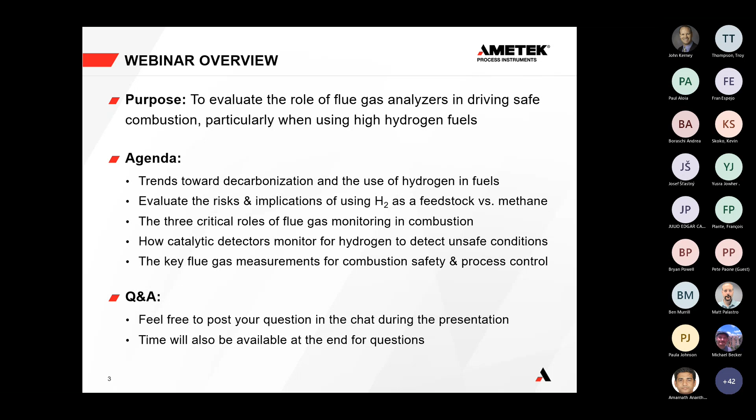So to start off, let's talk about decarbonization. There's an inherent move towards decarbonizing combustion processes in industry in general. Governments have signed a lot of net zero carbon emission policies. There's a big focus on climate control and reducing greenhouse emissions, and that is particularly the case around carbon dioxide.

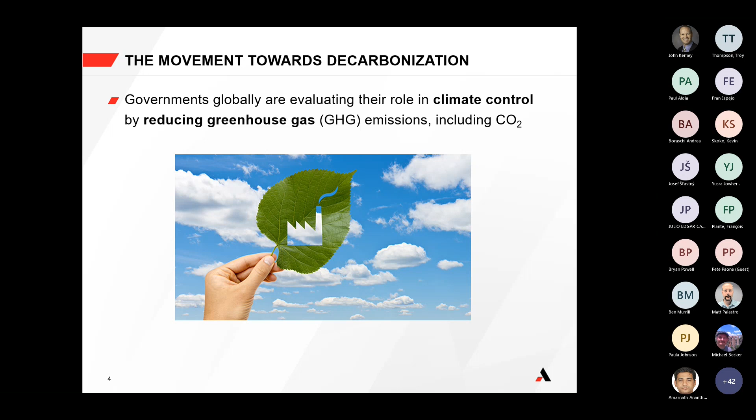And a lot of industries in the midst of it still require combustion. Combustion generates carbon dioxide, but a lot of industries still depend on that, including hard to decarbonize industries such as steel, cement, and chemicals, but also things like mobility in vehicles and ships and transportation. So there is still a heavy dependence on combustion and combustion-related processes.

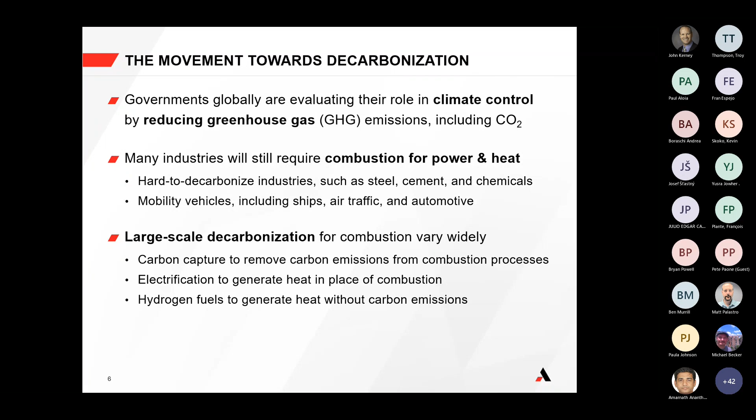When we think about large-scale decarbonization around combustion specifically, there's three methods that come up pretty commonly. There's the carbon capture method, with different carbon capture methods to remove carbon emissions from the combustion process itself. There's also electrification to generate heat in place of combustion, using electricity so that you don't have to rely on the combustion process. And there's also the use of hydrogen, which does not have any carbon atoms, so using hydrogen as a fuel to generate heat without carbon emissions. So that's another option as well.

So when you look at it, combustion remains important for our future, but it's also moving towards decarbonization. So we have to think about how are we going to decarbonize our processes.

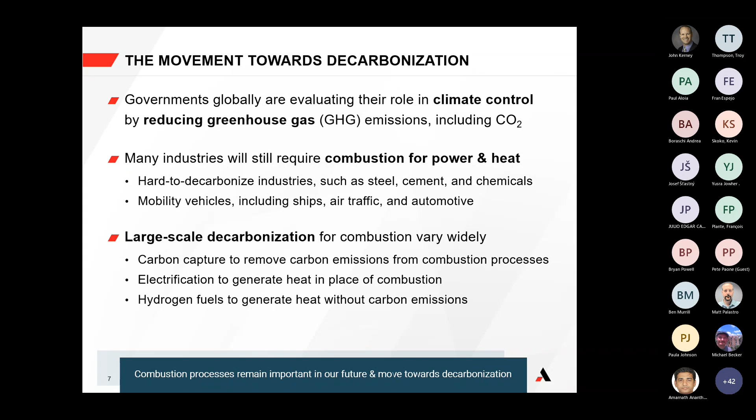So let's talk about those three methods: carbon capture, electrification, and hydrogen. When we think about carbon capture, whether that be pre-combustion, post-combustion, or oxy-fuel carbon capture, however you choose to remove carbon dioxide from the combustion process, it's pretty well suited for certain applications.

Carbon capture is much more economical, especially on the grand scale when you have a singular process or a singular pipe flow that holds a large amount of carbon dioxide. So things like blue hydrogen production, with autothermal reforming or partial oxidation or steam methane reforming, different processes that generate syngas can use carbon capture very well because much of the process stream is consolidated, and that centralized singular source can be sent downstream to the carbon capture system for treatment and removal of the CO2. So it's pretty well suited for large scale systems and centralized emission sources.

But it becomes more of a challenge, especially when you look at flue gas carbon capture, where some plants have many different carbon point sources, combustion point sources, where it would take a lot to revert all of those stacks to a common duct and then use low pressure carbon capture methods to remove the CO2. All of that tends to be much more costly for those types of carbon capture methods for flue gas, and it can require a significant amount of equipment for those processes. So that's just the view on carbon capture.

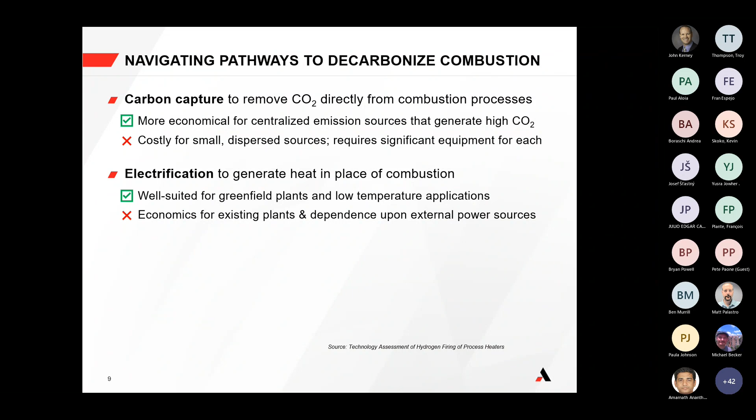And then for hydrogen, fuels tend to be much more versatile. It's sort of agnostic whether or not it's a centralized combustion source or small dispersed combustion sources and furnaces. So much more flexibility there because you're just basically changing the fuel from what may be natural gas or oil to hydrogen or a hydrogen blend. So it's much more versatile from that respect, and it has much less of an impact at the combustion source.

There may be considerations - it would be prudent to get an evaluation to see how your burner can handle hydrogen fuels, but outside of changing maybe the burner and some piping, it has much less of an impact at the combustion source itself. You're not installing large amounts of carbon capture systems, for example, large absorber towers, or changing the entire vessel to be electrified. So it has much less of an impact on the combustion source itself, and it also has less plot space requirements - like I said, there's no major absorber tower to accommodate within your plant.

And the other thing to realize is that hydrogen fuels are not new. They're actually used as a byproduct fuel in many industries. One case that comes up pretty often is refinery fuel gas in refineries - some refinery fuel gases can contain up to 70% hydrogen. So it's not a new thing, and for some industries it's pretty common already. So when it comes to hydrogen as a fuel source, it certainly offers the most versatility for existing combustion processes.

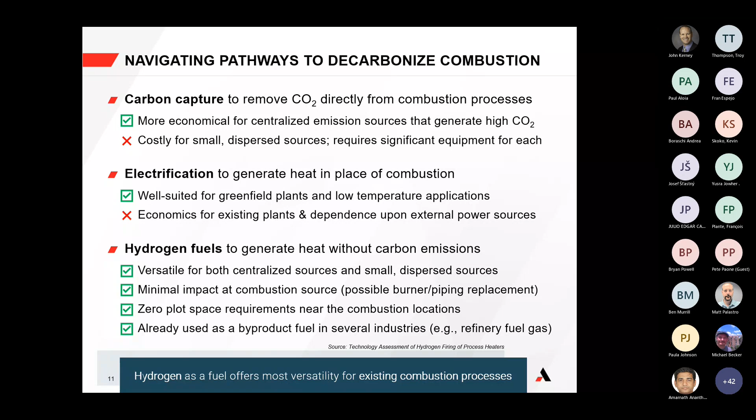Now let's take a look at combustion. Let's think about combustion and talk specifically about how the hydrogen molecule compares to the methane molecule. We can first talk about the physical properties and then we can go into the combustion properties.

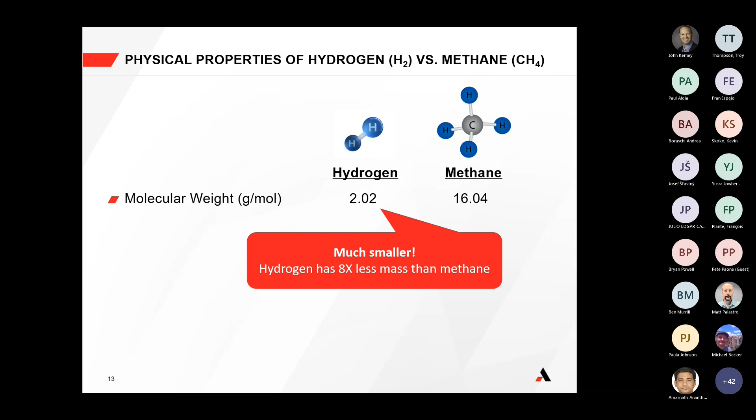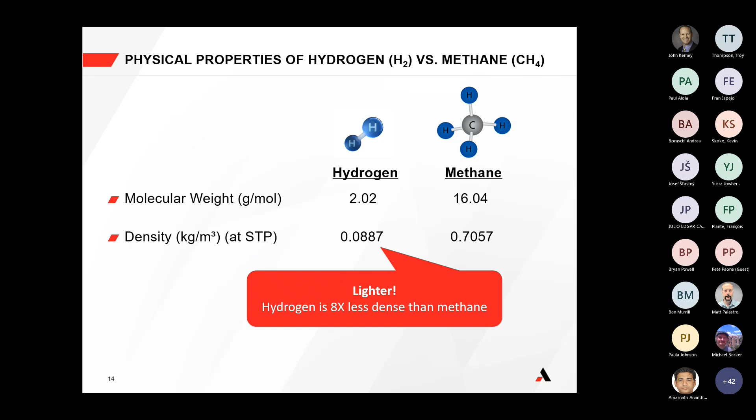On the physical property side, one of the most notable things is just the fact that hydrogen is much smaller - it's 8 times less mass compared to methane. And as a result, it's also much lighter; the density is much less, 8 times less dense compared to methane. So already you have this very small and very light particle in your fuel source. That's some differences already. And then also, because hydrogen is a small molecule, at the same temperature compared to methane it actually moves 3 times faster compared to methane.

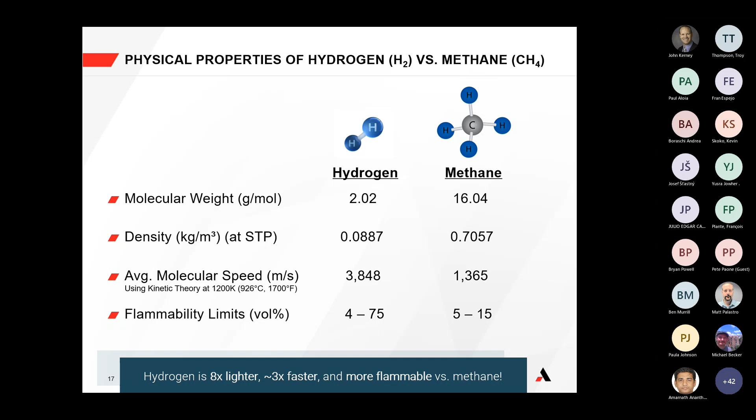So it's even more a fast moving molecule compared to methane at the same temperature. And beyond that, it has a much wider range of flammability. The flammability of hydrogen is considerably higher compared to methane, from 4 to 75%, compared to methane's window of about 5 to 15% by volume. So ultimately, hydrogen is 8 times lighter, almost 3 times faster diffusing compared to methane, and it's much more flammable. So when designing a combustion system and adding high hydrogen fuels and high hydrogen fuel blends, there's something to consider here for these differences. So that's just the physical properties.

Now let's talk about combustion properties. Hydrogen's unique because it's such a small molecule, but it also contains a lot of potential energy. So when we look at it from a volumetric basis, because it's so small, you're going to need 3 times more volume of hydrogen in order to meet the same heat release that you have with methane. So if you currently have your fuel flow monitoring system set up on a volumetric flow basis, you would anticipate needing 3 times more hydrogen in order to get the same amount of heat release as what you might be using with methane right now.

But on the flip side, if you monitor mass flow of your fuel, you'll need about a third of what you currently have as a mass flow for methane for the same heat release. So it's pretty important to be mindful about whether you're measuring flow on a mass basis or on a volumetric flow basis, because that has different implications for what you anticipate when using hydrogen as a pure fuel source.

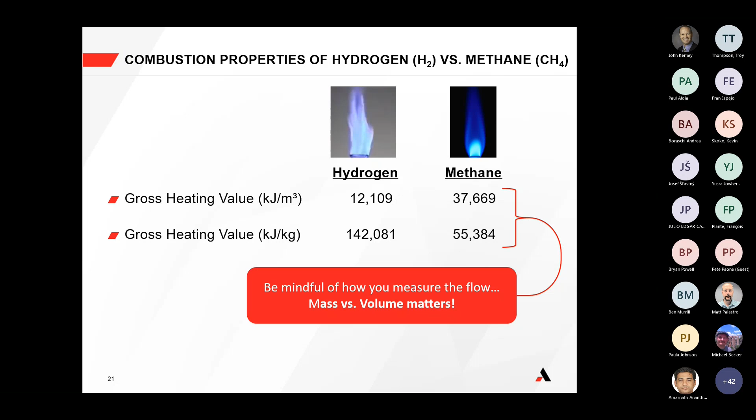Now beyond that, hydrogen also has a much faster flame speed, 10 times faster compared to methane. So if you use a premix burner, for example, you could have a potential issue of flashback, because those hydrogen flames will consume the oxygen as fast as possible. It is much more prone to flashback because of that faster flame speed. And then beyond that, it also burns slightly hotter compared to methane, so something to be mindful of, especially if you have certain metals around your burners.

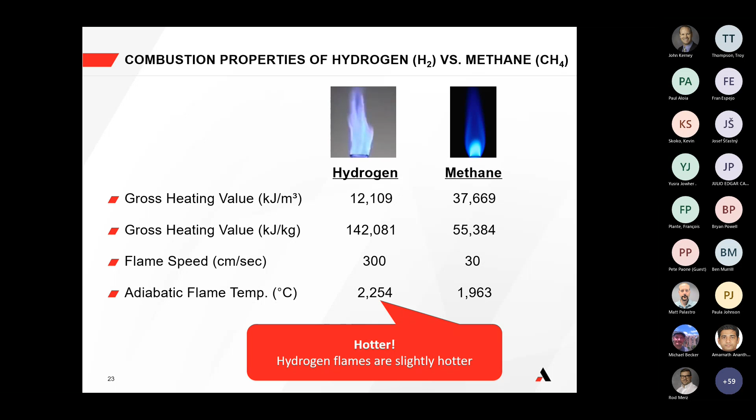On an ignition temperature basis, hydrogen is similar to methane, but it still requires less temperature to react compared to methane. And finally, less energy is needed to ignite hydrogen compared to methane, and it's not just a little bit less—it's 10 times less energy to ignite hydrogen over methane. So something to be aware of is that it's much more prone to sparking and ignition because of its much lower ignition threshold, being a much smaller molecule as well. Ultimately, the takeaways on the combustion properties of hydrogen are that it's 10 times faster on a flame speed basis, it burns hotter, and it's important to consider those differences in heating values, whether on a mass basis or a flow basis.

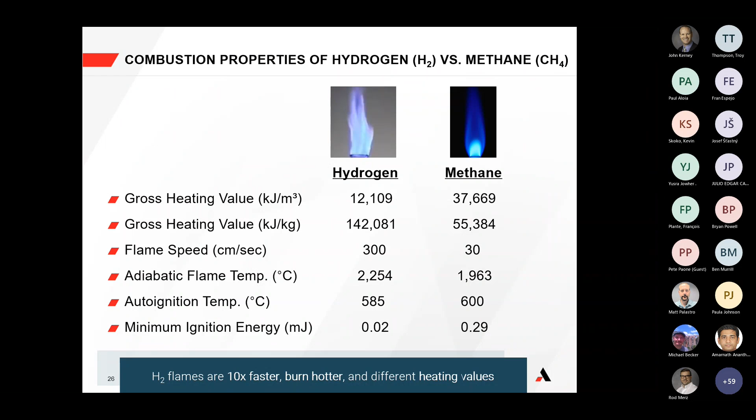So pulling that together, some other implications of using hydrogen versus methane: there's less air required. If you were to design the combustion reaction around the same heat release, you would actually need 20% less air compared to methane. So if you have a high hydrogen fuel blend and then move to pure hydrogen, you have to be mindful that you have the right amount of air, because hydrogen by itself needs less air compared to a methane fuel or a mixed fuel. It's important to give some margin, especially if you're going to have potential swings in the composition of your fuel gas. So something to be mindful of is that hydrogen by itself needs less air, but if you have a mixture of hydrogen and methane or other compounds, you're going to need more air as a buffer in order to handle that high hydrogen fuel.

And then on a potential NOx emission basis, because hydrogen moves faster and burns hotter, those potential hotspots create more potential NOx. So that's something to be mindful of—monitoring NOx levels or NOx requirements, because depending on how the air is staged at your burner, that could dictate how much more NOx you could see. So there is a potential risk of having higher NOx emissions.

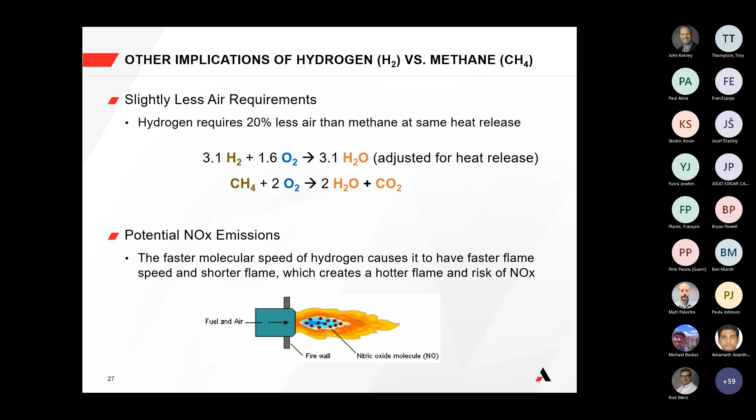So if we list those potential risks of hydrogen, distilling out what we talked about from the property side, hydrogen firing or high hydrogen fuel firing shows a potential risk of flashback, especially in premix burners. So that's something to be aware of.

It also shows the potential risk of higher thermal NOx production because of those hotter flame temperatures and because of that faster flame speed, smaller flame size, more potential pockets for higher temperatures, which generate higher NOx. And that could also impact permits, especially if your permit's on a ppm level basis, because you're changing that. It could also impact you on a permit basis because you're generating water and converting your permits to a dry basis. So that's something else to be mindful of as well.

Other risks: because of the high temperature, certain firebox geometries may have higher radiant heat directed towards the tubes, so higher temperatures at the tubes might be something to monitor. There's also a potential risk of overheating near the burner and other metal pieces. So it's important to think about what metal parts are exposed, whether a flame rod or other metal pieces around the burner, and consider either increasing the thickness of that metal or using a different type of metal to dissipate the heat and handle that exposure to hydrogen combustion.

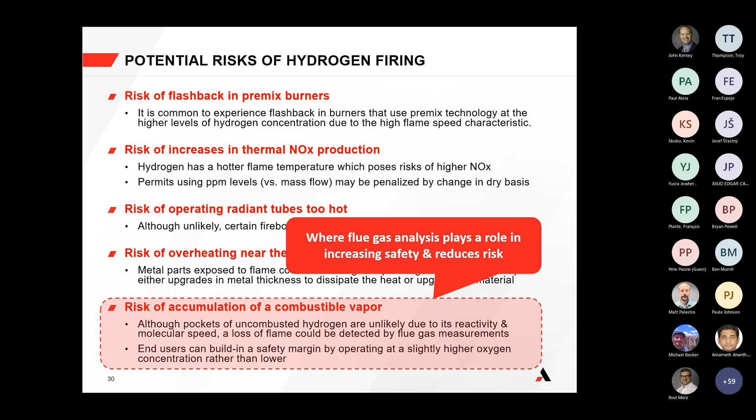So now let's talk about the three critical roles of flue gas monitoring. The first role is the operational set point, and I'll get into that in a second. The second role is optimization, so fuel efficiency, and the third role is safety.

When we talk about the operational set point, flue gas analyzers such as a zirconium oxide detector measure oxygen on an excess oxygen basis. That excess oxygen reading represents the oxygen remaining after all combustible content is consumed. So if there was any chance of a combustible cloud or methane, the excess oxygen reading would first consume all of that combustible content on the sensor itself, and then the remaining residual oxygen would be measured afterwards. So the excess oxygen measurement is important because it correlates directly to the air to fuel ratio at the burner.

If you have a low excess oxygen level, you can increase the air to the burner, and that would increase your operational excess oxygen set point. As I said, it ensures that you have sufficient air provided at the burner with a safety margin, so that you're not running at the jagged edge of stoichiometric conditions and potentially unsafe conditions.

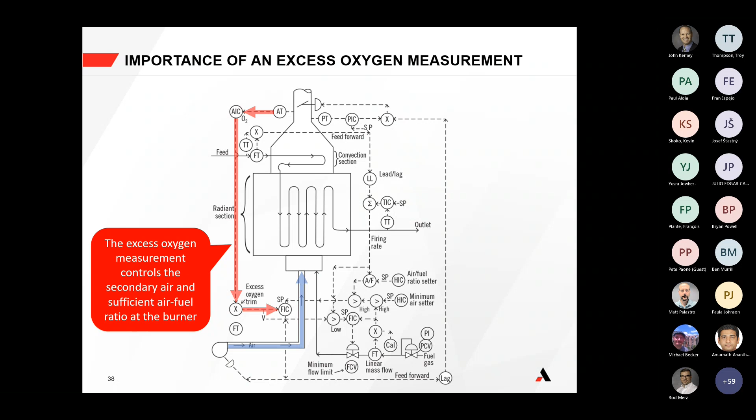So in either case, the excess oxygen measurement provides that secondary control, that operational set point, to ensure that you have sufficient air at the burner and a correct amount of air versus fuel for safe combustion. So that's the first important thing.

And then it's important to realize what's the optimal excess oxygen level, because your set point depends greatly on the fuel you're using. You could have many fluctuations based on the mixing characteristics within the burner, based on variable load and content of the fuel itself, especially if you switch between two fuels at a given time. It could also be impacted by humidity and density. So there's really no fixed value. So how do you know it's optimal?

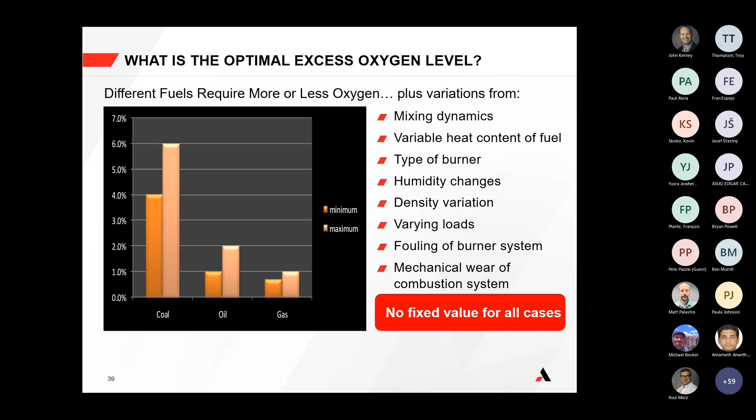That's where the second role of flue gas monitoring comes in, the role of optimization. Optimization means you monitor the health of the combustion process through what we call a combustibles measurement. Combustibles is effectively carbon monoxide and hydrogen. If you had a high hydrogen fuel, that would have some hydrocarbon content and some amount of hydrogen. The combustibles measurement would monitor for the unburnt carbon monoxide, and any incomplete combustion due to hydrogen would also be detected.

Just to put that into a reaction type state: if you were to use a high hydrogen fuel that has methane, for example, that methane molecule would first be consumed into ppm levels of carbon monoxide and hydrogen, and then only if there's enough oxygen present would that carbon monoxide and hydrogen convert further to produce CO2 and water. That's in the case of a high hydrogen fuel. If you had just pure hydrogen, you may have ppm levels of hydrogen you could monitor, and if you had spikes in hydrogen, you could effectively detect a flame out.

So let's talk about that role of optimization before we get into the safety element. When we talk about operating an excess oxygen measurement, as you increase your excess oxygen set point over time, you are running a little bit more and more less efficient, because at stoichiometric conditions, you could say 0% excess oxygen would be like the ideal scenario.

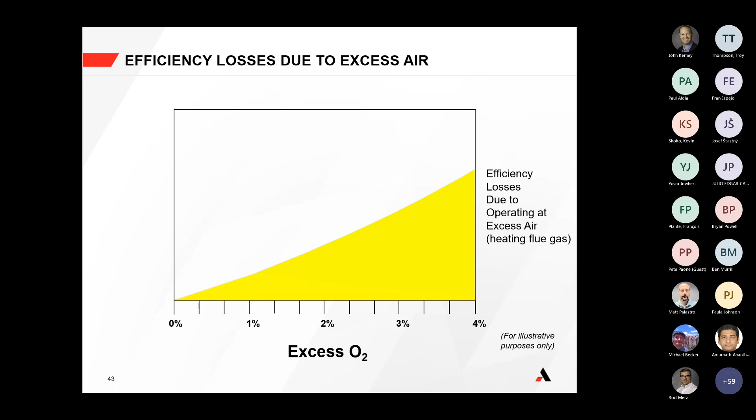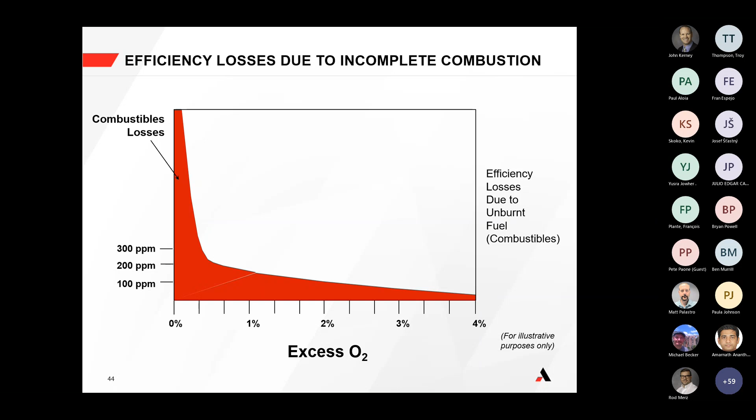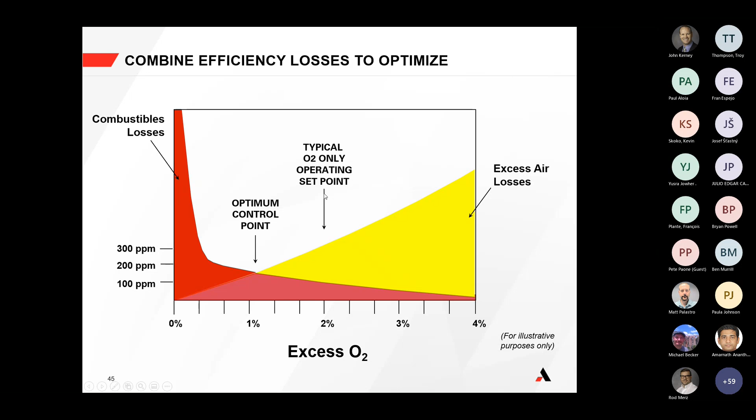But on the flip side, when you monitor combustibles, you have a potential risk of what they call combustibles breakthrough. So at some point, getting close to stoichiometric conditions of 0% excess oxygen, you have this risk of a significant spike in combustibles. And so by overlaying these two graphs in a hypothetical but very real way, you can go from what is once an operational set point to an optimal point.

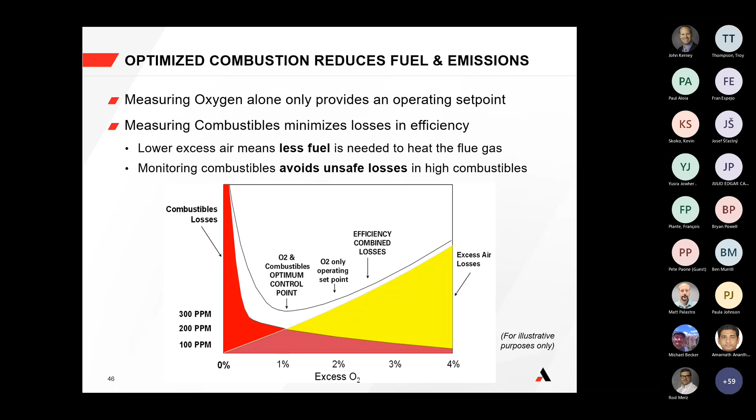As I mentioned, measuring oxygen by itself provides that operational set point, and that's the most important first step of any type of oxygen flue gas monitoring. But from there, that combustible measurement minimizes that loss of efficiency so that you lower your excess air levels, meaning less fuel consumption, and you also monitor for any potential unsafe condition beyond this breakthrough point. So from an optimization standpoint, there is a very real secondary reference point that combustibles plays in order to have an optimized combustion process, what we call optimized combustion.

And the third most critical role of flue gas analysis is the role of safety. Safety can come in the form of ppm level measurements for combustibles to make sure you detect the onset of incomplete combustion, and monitor for combustibles breakthrough. But then also the role of detecting percent level measurements of hydrogen and hydrocarbons from things that may be like a fuel leak or a loss of flame.

When we talk first about the incomplete combustion, as I showed you this graph before, a combustible detector can alert you for carbon monoxide breakthrough. So if you're using a high hydrogen fuel, you can detect that carbon monoxide breakthrough, and that combustible breakthrough can be detected using that combustibles measurement.

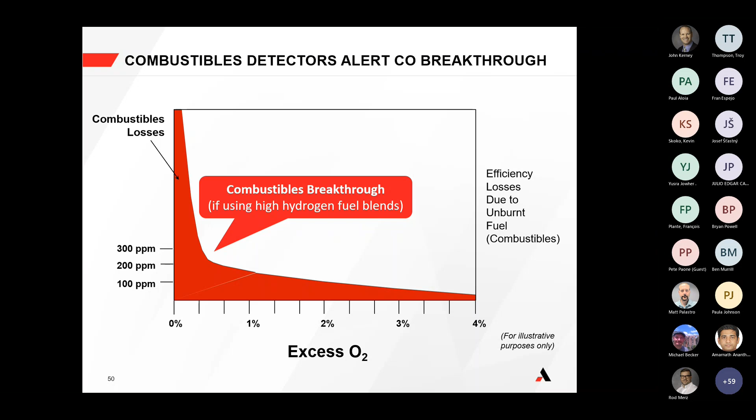And then when we look at the hydrocarbon detector, we look for things like flame out. Fuel leaks could happen because of a degraded burner tip, causing too much fuel to enter into the system, or potential flame out because the burner air nozzle was plugging, so there was too little air. But in either case, a hydrocarbon detector can be used to detect those percent level measurements of methane and hydrocarbon, and in this case, even hydrogen.

So hydrocarbon detectors provide that extra level of visibility for high percent levels. And this is also the case for startup, especially while you get permissives for light off, but also for operation. We have had customers who detected high levels of hydrogen in their process, and they were able to detect it early because they had a methane or hydrocarbon detector to monitor for that.

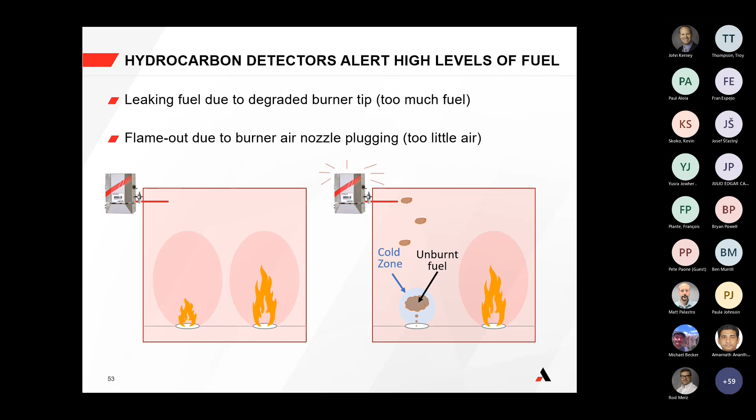Now let's talk about the specific catalytic nature of these methane and hydrocarbon detectors. So catalytic detectors are used for both methane monitoring and also for combustibles monitoring and for hydrocarbon monitoring. And all of them can be used for hydrogen because hydrogen is very reactive within the similar zone of both.

So one is coated with catalyst, and the other one is not. And based off of how the combustibles oxidize on the catalytic element versus the reference, it's able to make a measurement. Each of these measurements use the available oxygen in the flue gas in order to oxidize the sample and make a measurement. But what's unique about these detectors is that they are tuned for a particular zone of reactivity.

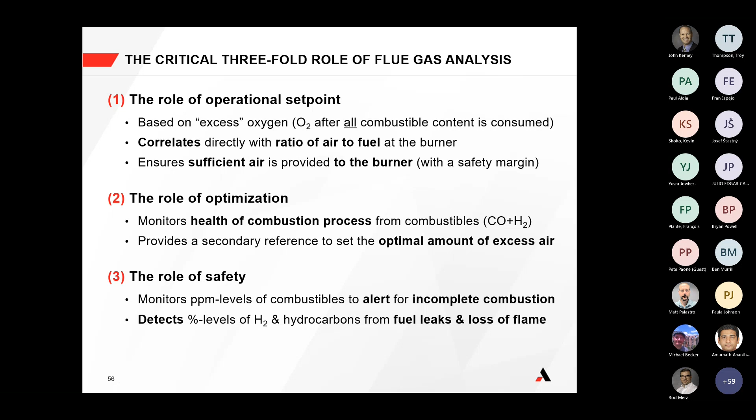So when it comes down to the flue gas measurements for pure hydrogen, you can use the excess oxygen measurement for safe operation. As I said, that's a primary indicator to make sure that you have a sufficient safety margin, that you have enough air to fully consume any amount of fuel in the flue gas, but also to make sure that you have a good operating range for your process.

A combustible detector can be used to monitor for ppm levels of hydrogen, and that can be important for safety, especially if you are running very low excess oxygen levels. It also provides a secondary reference point just to make sure that you're not operating too low where you have high ppm levels of hydrogen, for example.

And then it's also important to have a percent level hydrogen measurement for safety in the case of loss of flame, fuel leak, or light off. And even in some cases, different processes use methane to light off on. So by having a hydrocarbon detector to monitor for percent level of hydrogen, you can also monitor for percent levels of hydrocarbons and provide an extra safeguard for safety during light off and purge cycle.

So those are the three important measurements for flue gas monitoring for pure hydrogen for safe combustion.

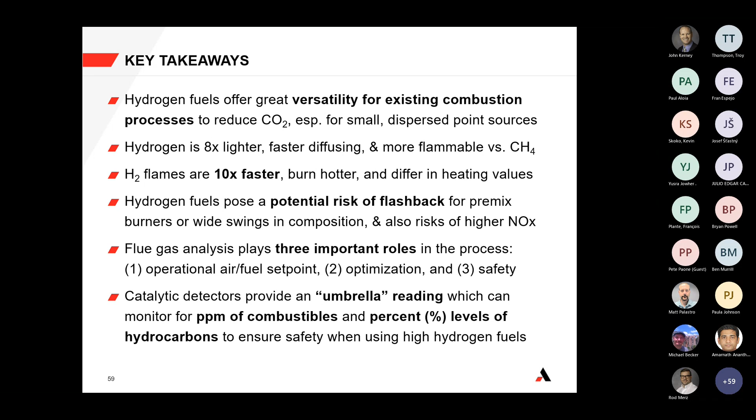So with that, I know it was a lot to take in, but we do have time for questions, so feel free to raise your hand or submit a question in the chat.

Hey, Tim, thanks for that.

There are a couple of questions in the chat. The first one came in when you were on slide 55 talking about the catalytic detectors. And this is a longer question. I'll read it, Tim, and then we can talk through it.

It says, when using methane, we measure the CO, realizing that CO sensors measure both CO and hydrogen. How to relate the value from the sensor when a combined hydrogen and methane gas is used, especially when the hydrogen uses less air. So for example, with methane, let's say the CO level may be 400 ppm. What value would we be looking at with 20% hydrogen added to the methane?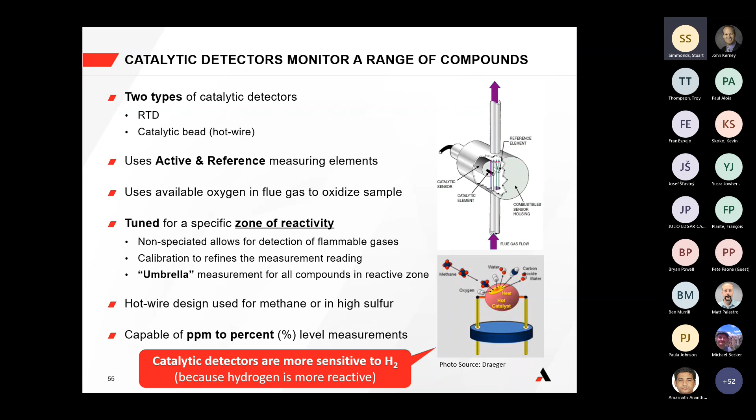Yeah, that's a great question. So I'll go back to this slide right here just to focus our attention and anchor our conversation. From a pure hydrogen standpoint, the combustible measurement provides that ppm level measurement in case there were any hydrogen.

So it's just more of a low level safety measurement when it comes to combustibles, especially when you're using pure hydrogen. But what my biggest concern is when there's variability in the composition. That's where I become very concerned, because if you go from pure hydrogen to any high hydrogen blend, you immediately have the risk again of combustibles breakthrough, of potential ppm levels of carbon monoxide to indicate unsafe conditions. So when it comes to pure hydrogen, you've got that ppm level visibility for hydrogen safety, and you've got the hydrogen detector for percent level measurements of hydrogen. When it comes to high hydrogen fuels, I still see the need for some type of combustible measurement, because you're going to want that visibility on whether or not you're close to combustible breakthrough.

Yeah, agree Tim, 100%. So all the time that there is some hydrocarbon in there, we can apply the same logic to not just the safety and the set point, but the efficiency point, your middle point, right? But if we trend towards 100% hydrogen, should we ever get there, your ppm breakthrough is safety - I understand that's great - but can we consider any way of doing an efficiency level, or do we need to look at it some other fashion then?

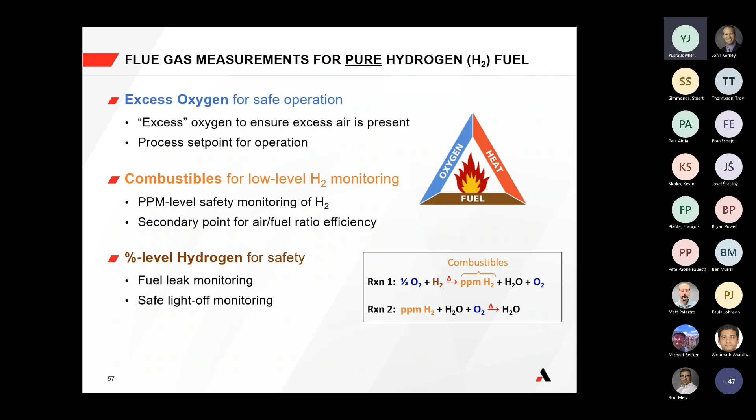I have one question. Let's say we have boilers, furnaces running on fuel gas, mixed fuel gas from natural gas and also off gas from the plant. Is it straightforward? If I could convince the management and we decide to go with replacing the fuel gas with hydrogen, is it as simple as changing the supply of the fuel gas, the type of fuel to be burned from fuel gas, which is methane rich, to hydrogen? Is it as simple as that, or does it require changes in all the setup in firing philosophy?

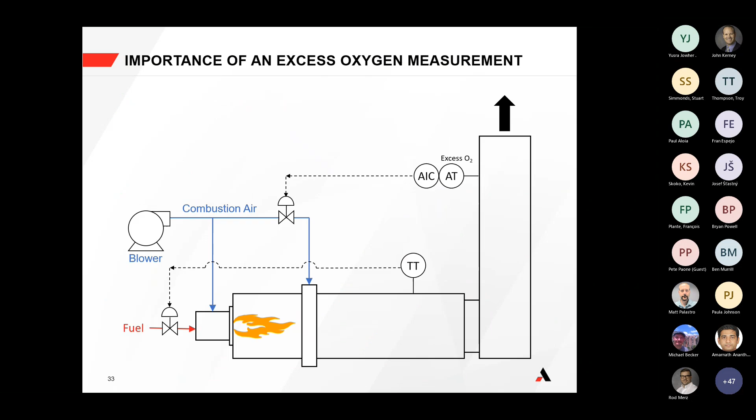There's also things like making sure you have the right piping material, stainless steel piping material, because carbon steel can face degradation over time. So you want to make sure the piping material you're using for your fuel, or if you have a separate line, is intact so it can handle that type of change in fuel. Hydrogen is unique and has certain characteristics when you think about the piping as well. So I think it'd be prudent to have a review of your process to make sure it can use hydrogen.